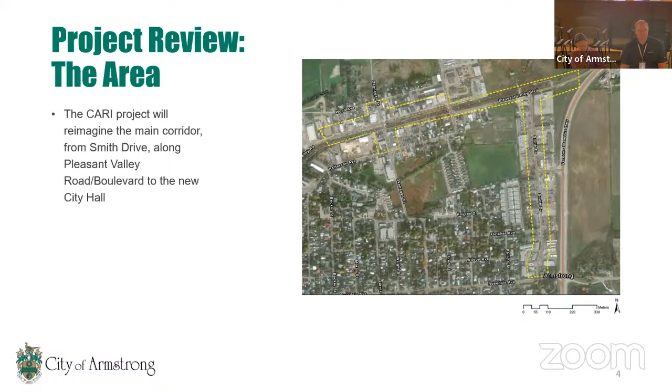So this will just be a review of where we are, what the background is on the project. We're seeing the CARI project being to reimagine the main corridor from Smith Drive along Pleasant Valley Road and Boulevard to the new City Hall - so the downtown area spanning between the highway and City Hall. The goal for this project is to increase gathering spaces, improve the infrastructure, attract and retain businesses, include, connect and welcome residents and visitors, and improve wayfinding accessibility.

Now, the last time this area was revitalized was 1988, so my family remembers when it was all fresh and new, but there have definitely been some evolving priorities in the region. We're looking at ways to factor in the active transportation plan, and ways to incorporate findings from the traffic safety plan and bring those into any kind of update for the downtown to make sure we're including those. Those will help guide the development of this project.

Also, Armstrong has aging infrastructure, so when we're doing this work, if we're looking at upgrading a road, there's going to be a component where we say, if we're upgrading this road, are there any sewers or utilities that need to be upgraded as well, so that we can roll in capital planning into the overall CARI project as we move forward.

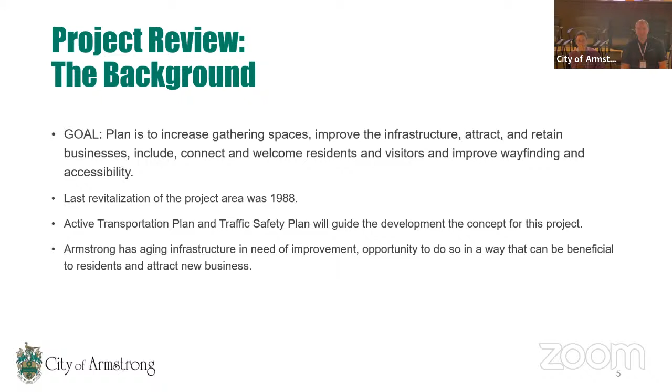A bit of background on the active transportation plan: it was passed by council and finalized in May 2023, and Watt Consulting had done the work for that. I thought it was important to include the vision statement and goals, just to reiterate what we're hoping to achieve on the active transportation plan: the network will empower residents and visitors of all ages and abilities to move seamlessly and safely within the community.

Active transportation facilities connect to public transit and offer protection from motor vehicles where possible to make walking, rolling, and wheeling the preferred choice for trips to local and community destinations. Armstrong is a leader in active mode share in the region and supports and integrates regional active transportation initiatives and connections - a connection like that to the rail trail network could be one of those connections.

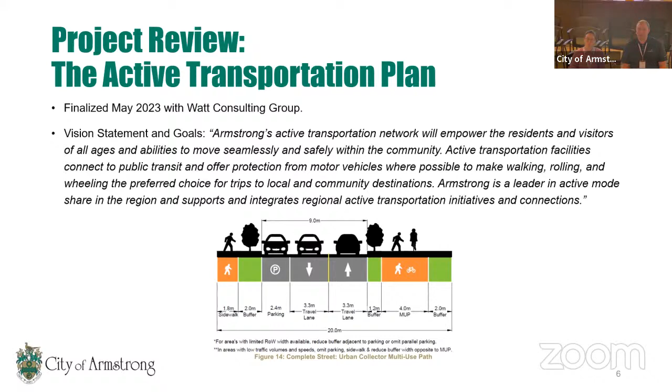At the bottom there is a snip of one of the possible configurations put forward in the active transportation plan. There are others, but this is one that we see represented in some of our current concepts, where there is road traffic, parallel parking, and a shared multi-use pathway that can accommodate both pedestrians and cyclists.

The road safety study was also from 2023, quite recent, again with Watt Consulting Group. There are a number of areas covered by this. It talks about Armstrong as a whole, but there are areas within the CARI study area, including the intersection of Pleasant Valley Road and Mill, as shown on screen, where there are safety improvements to rectify some of the challenges at that intersection.

The intersection of Pleasant Valley Boulevard and Okanagan would be another opportunity where there are challenges with that long intersection. This report also talks about things like removing angled parking stalls and eliminating rear end collisions. So when approaching the CARI project, we are factoring in not just the active transportation plan, but aspects of the traffic safety report that was already reviewed and incorporated with the City of Armstrong.

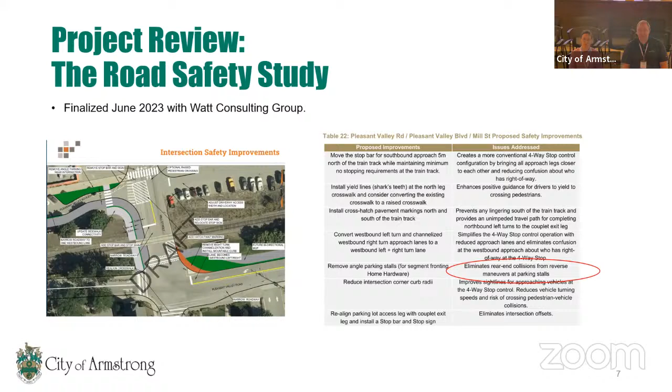Wayfinding, helping people find their way around. Looking at how we can implement the community vision and revitalize the downtown, get people shopping, bring them into local businesses. Finding landscape upgrades, finding ways to do all this and make sure it's the right size for Armstrong - something that can be accommodated within the budget and fits the character of the community. In that, we're looking to achieve buy-in from the community for that shared vision before embarking on developing engineering design drawings.

So it's an iterative process, step-by-step, to take those ideas and work on them before we actually roll them out into any kind of design or implementation.

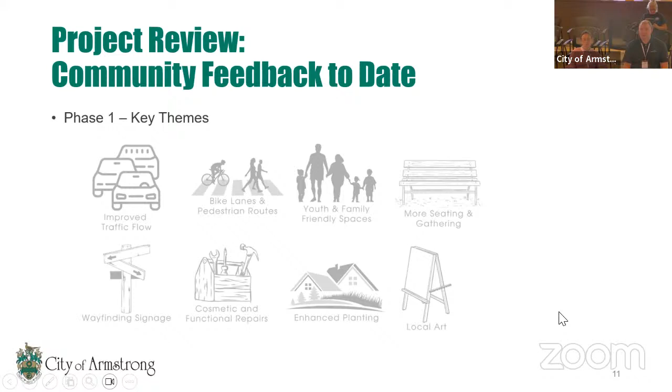And then in phase 2 was when we were looking at the actual first cut of the concept plans that are being shown to the public. Some of the major concerns raised were concerns about loss of parking, so there being a desire to see no net loss of parking, or effectively keep parking the same.

There were concerns about whether we were accommodating the rail trail at the price of the community, or if the community impacts were sustainable. Business impacts: members of the business community had voiced concerns that either changes to the parking or loss of parking could affect them. Accessibility impacts: whether this would still provide the same opportunities for members of the community who are primarily using their vehicle to get around or to get to businesses, if that could impact them in a way that would be challenging for them to get out and do their errands and chores.

And then also another one was a desire to keep the turn lane on Smith Drive. So we heard some feedback that it had previously been removed, put back, and there were some different opinions or feedback on how that had gone at the time.

Is it going to sleep, the mouse?

So the drawings that we'd reviewed, the concept drawings at those engagement sessions, were concept drawings. I think it's important to reiterate that those are conceptual only. These are not design drawings, these are not going to tender. They were developed in coordination with the Community Partner Group, which is the Chamber of Commerce, Communities in Bloom, and Community Futures, as well as City of Armstrong staff, and reflected the goals and feedback we received in the phase 1 engagement. Community feedback has been incorporated in the concepts and phasing.

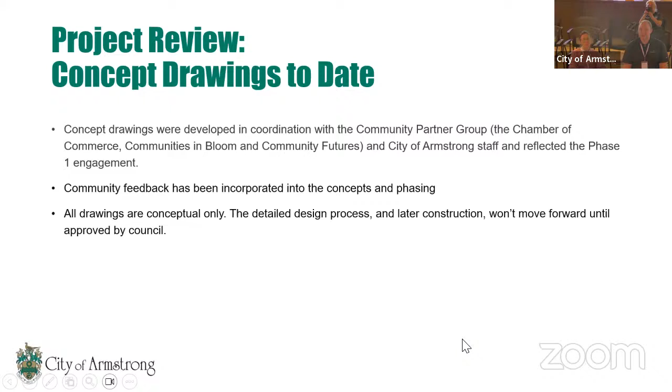All right, I think I'm just about done talking, so we'll get into the council discussion portion. The way we were envisioning this is that we could bring up the set of concept drawings and walk through phase by phase, or look at the sheets and see if there's any main points we want to touch on. If there's any other questions, or if we skip a page, feel free to bring those up, we can circle back around. Or if there's larger overall questions about how we're working with those terms of reference, whether it's the active transportation plan, the traffic safety plan, any of those other items, let's have a discussion on it.

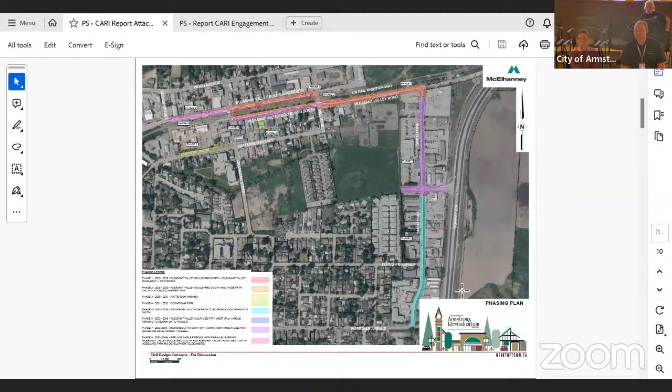So I'll lead us off here with the phasing plan. We've broken it up into a number of different street segments. Generally, if you look at the drawing, there's Smith South, Smith North, the section of Pleasant Valley between Smith and Mill, there's the Pleasant Valley couplet, there's the portion between Pleasant Valley to City Hall, and then we've got a little chunk down at Patterson there. So any questions or feedback about how we've broken it up here, or the phasing overall?

We've got a phasing plan there that goes out to 2040 plus, so this is a longer duration task. It's not an all-at-once kind of thing, and it will have triggers at certain portions of it, whether those are development or provision of appropriate parking. Any questions or comments on this sheet?

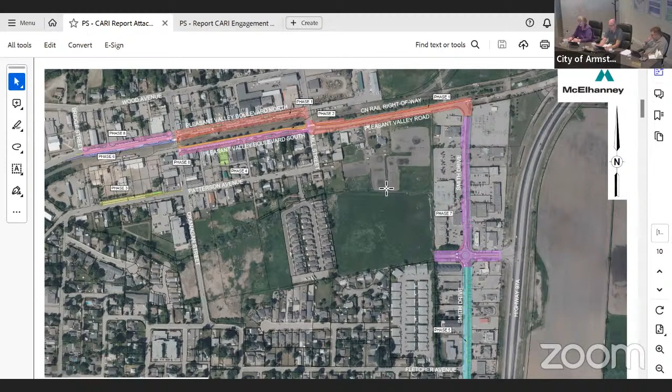Just a comment - I'm super excited about getting the roller coaster ride done first, and I hope that's phase A of phase one. I think it's an expectation from the community that that's a huge priority, so I don't suppose there'll be any feedback from that road construction.

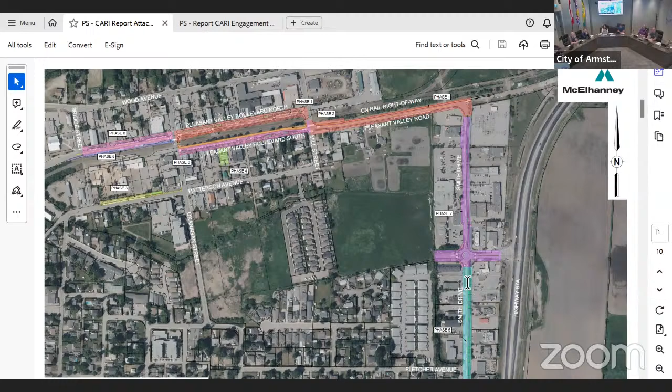So just one other thing - that phase from Shepherd's Corner down to the diner, as it is planned now, will only lose one parking spot. Is that correct? I think that's really important to make sure everybody hears that.

I have a feeling when people see how that street can look, with potentially wider sidewalks and gathering spaces and so on, it could be a light bulb moment for some. I know people are mostly hearing about the parking, and I'm not sure everybody is aware that the sidewalks will be wider, the landscaping will be improved, what doesn't look good won't be there, and there won't be obstructions in front of Spirit Square.

And that crosswalk will be raised and more obvious, and there will be a truck route with no trucks allowed on there. There are so many components to that one piece that's more than just losing one parking spot, that I really hope the community will gather around that first step and let us get going on it. I think it's really positive.

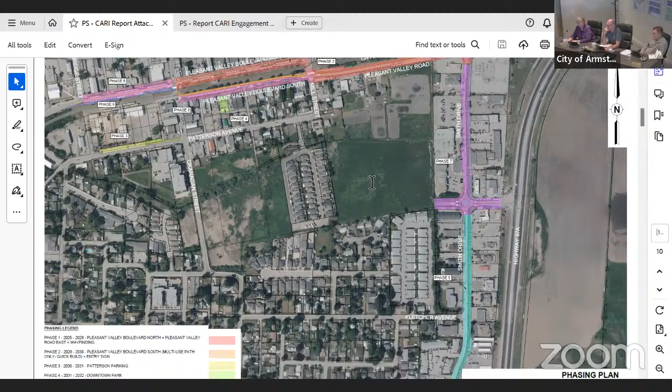And like I say, when I was at that open house, most of the people were concerned with parking. I'm not sure that most people knew all the parts that were in that phase.

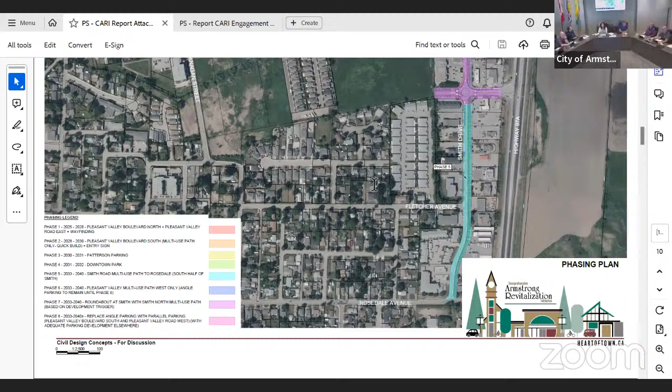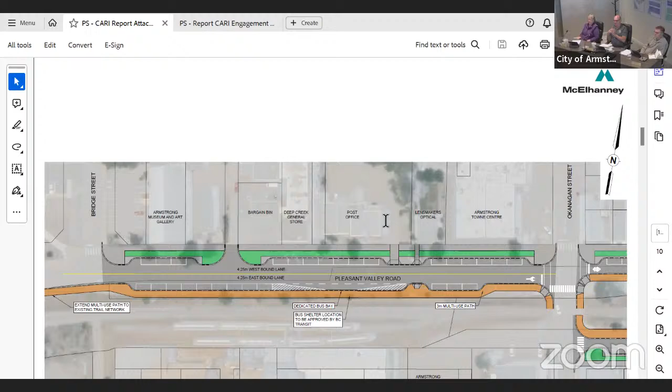Can we go back to that slide you had up, just phase one, please? Okay, but if you can go to phase one, that would be great. My concern is still the parking.

Sorry, Cheryl, but if it's parallel parking on both sides with one lane, I can envision a week and a half to get from one end of the block to the other if people are parallel parking from both sides. Whereas if we kept the angle parking and didn't lose the parking on that side, I don't understand how that's any better than what we have now. I understand the angle parking isn't ideal, but I don't think parallel parking is ideal either - all I hear from the people I talk to is they don't want to parallel park. You can't have old people parallel park.

I know it's ageism, but these are old people telling me this. So one lane with parallel parking on both sides just slows everything down to me, but that's my view.

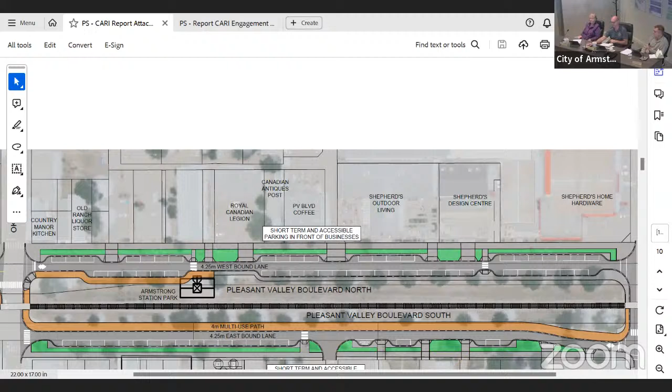So maybe now is the time to give us your rationale as to why we're changing from angle to parallel parking and sell us on that recommendation - that gives us an idea to understand both sides a little better. I'd like to understand from the professionals why this is being recommended over angle parking. I hear safety, but I'm not quite sold on the safety issue right now, especially since the traffic is slower and there are restrictions on commercial traffic there. So sell me on that and explain why that's the better feature.

Yeah, so we've got a few reasons for the parallel parking configuration. Foremost is safety - that's the number one reason. That comes through from both the Watt Consulting report, which talks about eliminating the angle parking and converting it to parallel parking, and also from separate studies.

Again, they're not hyper-local studies - not done in Armstrong or the Okanagan - but aggregate studies that show a reduced risk when converting from angle parking stalls to parallel parking stalls. Being conservative, it's something like a 30 to 40% improvement. Some studies say higher, some a bit lower, but let's choose that as an average.

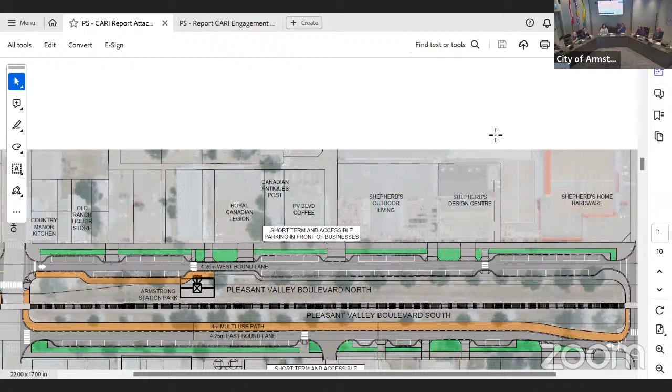I'd really hope that you don't see this as a negative. This is sort of like a workshop, and with all the feedback we've had from the community, it should have happened a little sooner, but we've had an opportunity to try to sort out another way and make as many people happy as possible. We'll never make everybody happy, but this was a good opportunity to talk it through and get everybody's thoughts. Please don't feel that we've pounded on you, and just hope we can move forward with something kind of exciting too.

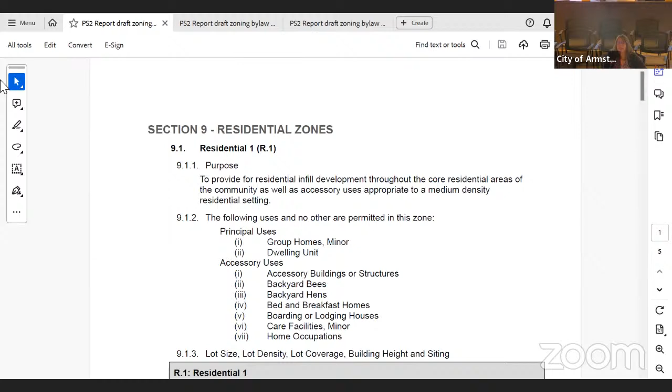I don't know, it just needs to wake up, it falls asleep. So it would have,

This is similar to what you saw before. This is the way our lawyer has said it needs to work. Parcels under 280 square meters can have up to 3 units. Parcels greater than 280 square meters could have 4 units. There's no sliding scale on the R1 zone. It would just be a maximum of 4 units anywhere that was zoned R1.

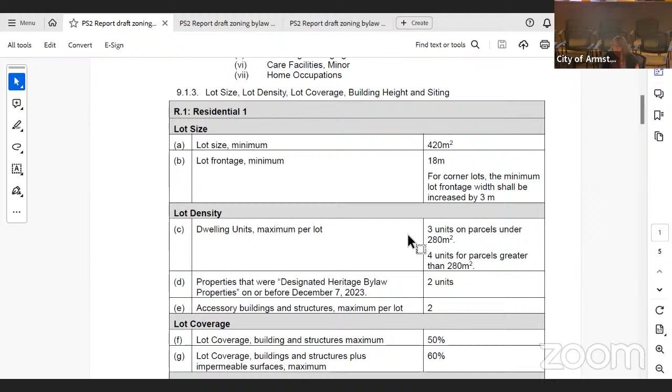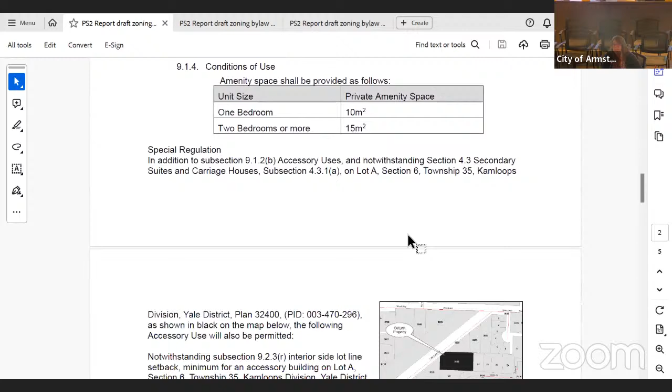And then we would create an additional zone called R2. The R2 zone would integrate that sliding scale, so it would still have that same wording: 3 units below 280, 4 units above 280. And then I put 1 additional unit for every 150 meters above 420. So it's not the 300 you were looking at, because that creates nonconformities, and it's not spread out across the whole city. It's only on the parcels currently zoned RM2 that were suited for townhouse development.

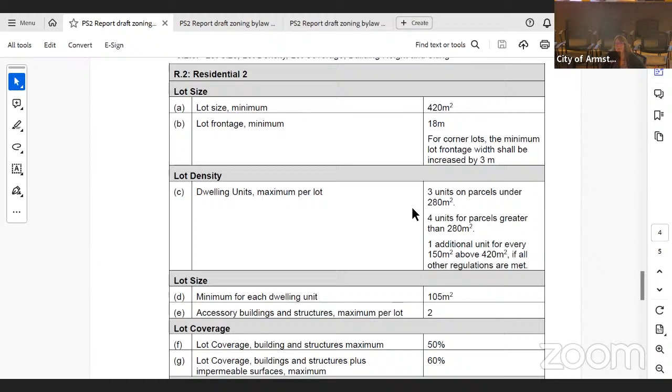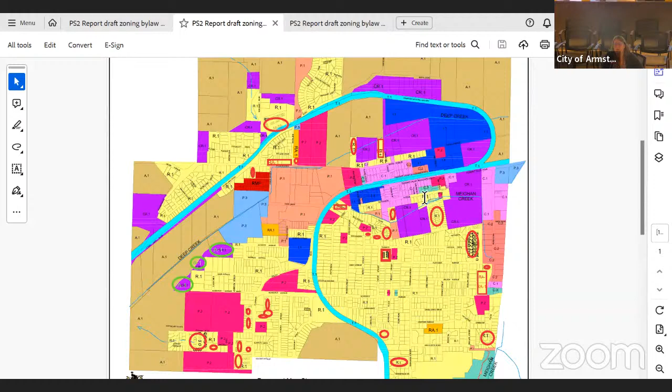So just so you can see this a little better, I'll make it bigger. This is our proposed zoning map. There's a few changes still because it's a draft we're working through, but anywhere that has circles are the existing strata developments that would become this new R2 zone. They would have that sliding scale and be areas of density. If they fully burn down, they might be able to build more dense than they are right now, but that zoning is only directed to those parcels rather than scattered across the whole community.

All the yellow would be the R1, so those would only be allowed up to 4 units as outlined by the province. And then the square areas—that's a little hard to see, this one's a square, over here's a square—are the places that currently have RM2 zoning, like those other townhouse stratas, but are actually apartments. So they would move to the residential apartment zone.

So it would basically create those 3 levels of zone. We'd have the medium that allows up to 4, the medium-high which has that sliding scale, and then the apartment zone. I think in my mind it creates that balance I heard you looking for when we were talking about it, but it also allows us to have higher density to the levels like we already have now, and maybe a little bit more, which is a nod to what the province is looking for anyway from us.

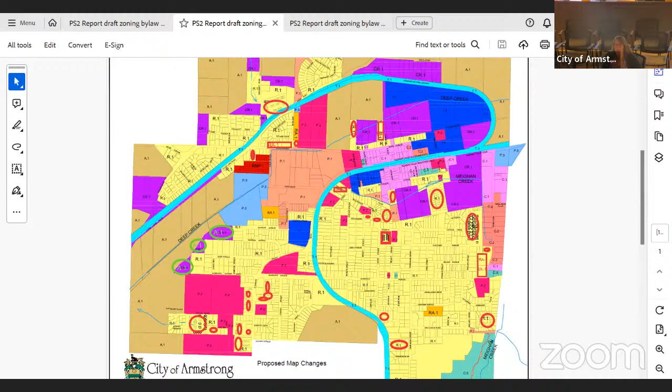But in controlled areas, not across. And then there are still some bigger parcels, but they would have to come before council to be rezoned to that R2, or they would subdivide into small parcels that could have 4 dwelling units apiece. So I feel like this option provides a bit of balance. It addresses what I was hearing as your concern, but also allows us to still have areas with more density.

Are there questions? Just thank you for doing that. I think that adding the extra zone makes me feel a lot better, more so than that kind of arbitrary 300 number I threw out there the other night. But yeah, I'm glad, and I like that it maintains the integrity of current neighborhoods and also allows for that flexibility if needed in those areas that are already higher density. Thank you, I like it.

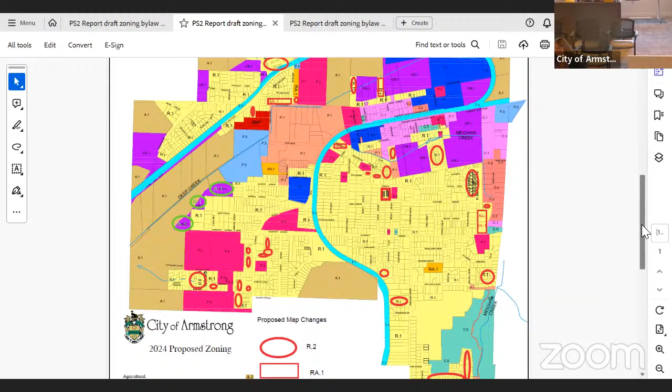Thank you, Lori. I also think that suits our needs really well. With that being said, I will throw out the motion that the Committee of the Whole rescind the following resolution, Committee of the Whole 624: that the Committee of the Whole recommends to Council that staff update the draft zoning bylaw to reflect the sliding scale density of an additional unit every 300 meters squared over the 410 meters squared. So we'll be voting to rescind this and we'll replace it with another.